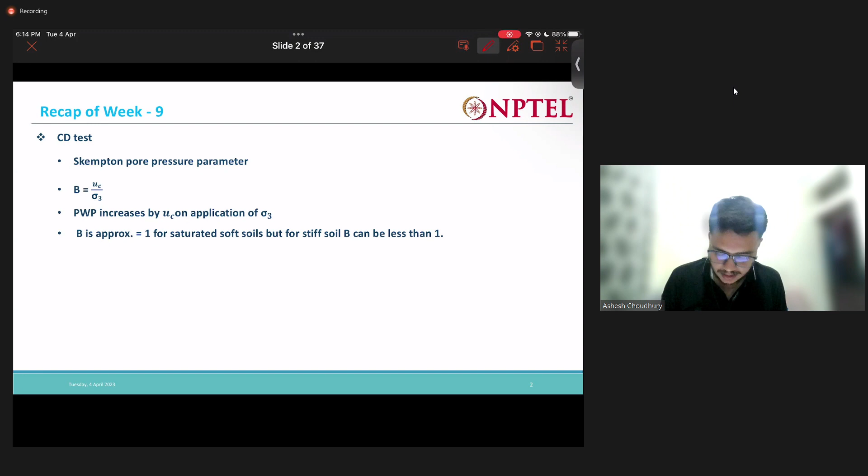Okay. So you might be wondering, how do we actually saturate the sample, right? So there is a process of saturating the sample.

Over the years, many researchers have done experiments and given a process where we can saturate the sample very fast. What we do is apply back pressure and cell pressure simultaneously, and using that we saturate the sample.

Also, we need to put some filter paper around the sample so that the soil gets saturated. There is a defined procedure which you can find in the literature, using which we saturate the sample.

And how do we check that our soil is completely saturated or not? We check it by calculating our B parameter, and our B parameter should be close to 1 to ensure that our soil is completely saturated.

Okay, so after we ensure our soil is completely saturated, we start our consolidation stage. How do we start it? We keep on increasing the cell pressure and then fix it to 1 point. Then we open the drainage valve. As soon as you open the drainage valve, what will happen?

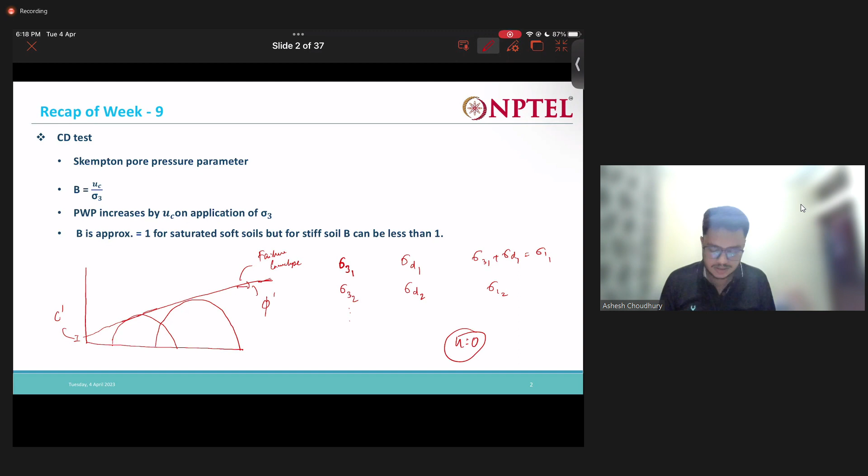Now in the CU test, the first stage is exactly same as the CD test. So there is consolidation. After the consolidation is over, what we do is close the drainage valve, and after closing the drainage valve, we apply our deviator stress.

So here we are not allowing drainage to occur. As we are not allowing drainage of water to occur, what will happen? As we are applying the deviator stress, as we are increasing the deviator stress, my pore water pressure will be generated, right? Pore water pressure will keep on increasing as soon as we start applying this deviator stress.

So here we define another pore pressure parameter, which is A, here we have written as A bar. A bar is nothing but the ratio of the change in increasing pore pressure due to the increasing deviator stress - pore water pressure increased by this amount due to increasing the deviator stress by this amount, in the second stage.

As I was saying, why is CU test sometimes preferred over CD test? Because CU test is actually faster. In the second stage, we need not bother about the drainage of water, so that undrained second stage in the CU test can actually be completed very fast. CD test is actually very long, so if you want to expedite the process, we can do the CU test.

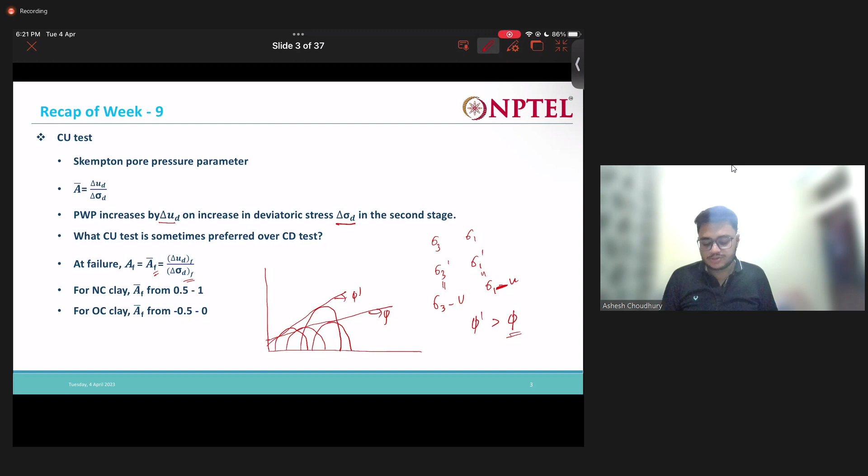So we'll be getting this. Now we see that at failure, my A value, A bar value at failure - we write F for at failure - is nothing but ud at failure by sigma d at failure. So for a normally consolidated clay, my A value generally varies from 0.5 to 1, and for over consolidated clay it varies from minus 0.5 to 0.

So as you keep on shearing, what will happen - this part actually is my normally consolidated part. In the normally consolidated part, my pore water pressures are always positive, and in over consolidated soils, or in dense sands, there is a tendency that if drainage is not allowed, then negative pore water pressure develops. Due to this development of negative pore water pressure, we are actually getting this negative A value.

Okay, you are getting this negative A value from here. If the soil is normally consolidated, my pore water pressures are always positive. So that's why we have this A value varying from 0.5 to 1. Okay, so these are the differences.

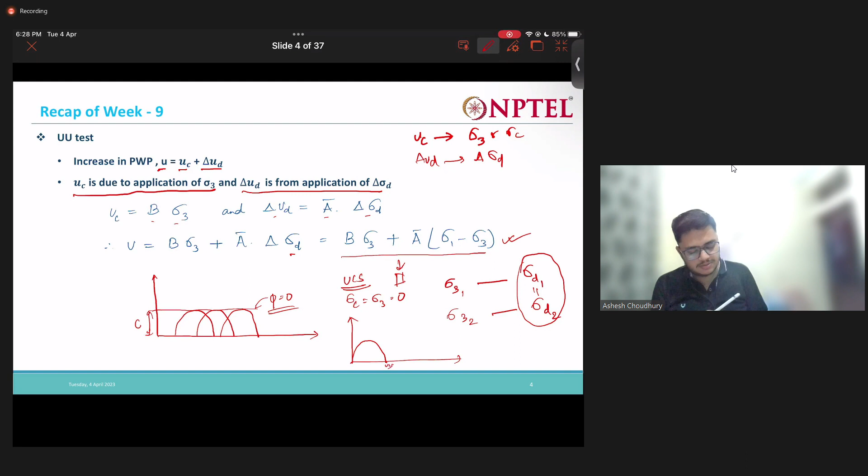Now if I want to find my C value, the cohesion value, this is my cohesion value. If this is my UCS, say QU, this cohesion will be nothing but QU by 2. So in the UCS test you get a circle something like this, where sigma 3 is 0 and this is nothing but my QU.

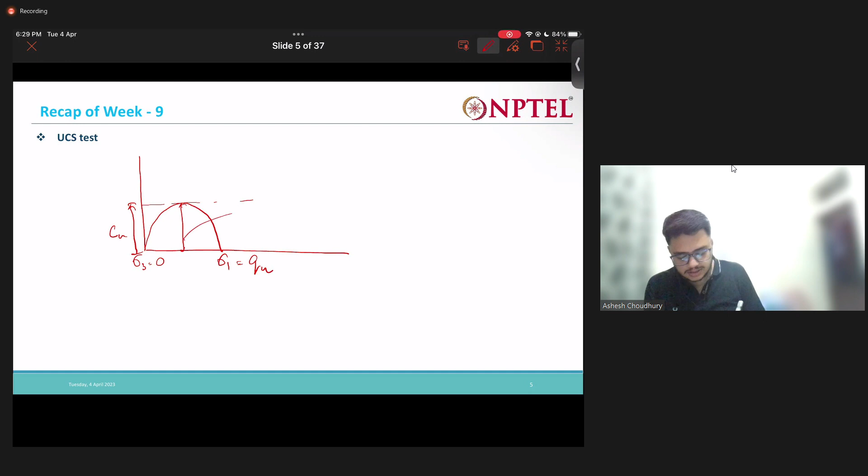So how much is this length? This length is nothing but QU by 2. Now what is my shear strength? C plus sigma tan phi. So from here, since phi is 0, it's nothing but C, which is QU by 2.

So generally, theoretically, whatever C value you calculate from the UCS test should be equal to the UCS value divided by 2, and should also be equal to the cohesion value you calculate from the UU test. Theoretically, this should be the case.

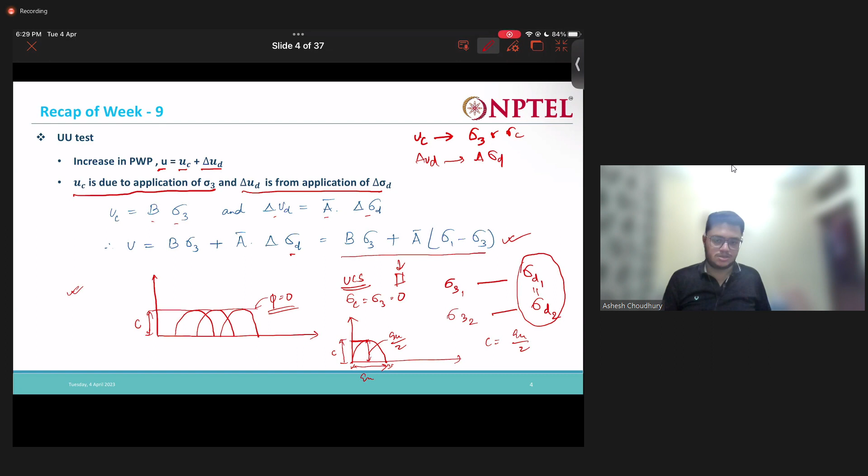Okay, so the next topic introduced in the previous 9th week lecture was stress path. So what is stress path actually? The stress path is nothing but the locus of the points representing the stress states during the progress of the test. Take for example a triaxial test, or for simplicity, a UCS test.

So in a UCS test, what you are doing is you keep the sample and you keep on applying axial stress, axial load. So you're increasing the axial load, say first 1, 2, 3, like 3 kPa, 4 kPa, you're increasing the axial load, right? So at a certain point it gets failed.

This progress of the test, you are gradually increasing your applied stress. That gradual increase in applied stress is actually represented in terms of a stress path. That's why we say it is the locus of the points representing the stress states during the progress of a test. So by seeing a stress path, we can actually guess what kind of test has been conducted on that soil.

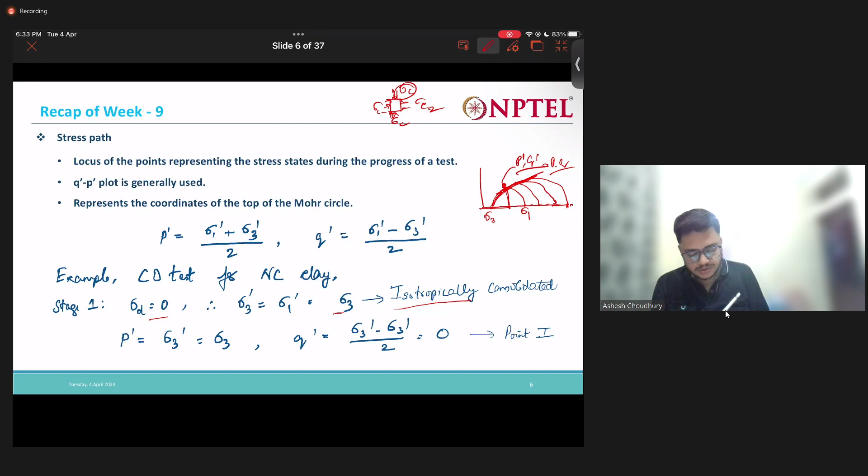So for normally consolidated clay in the first stage, sigma d is 0, and it's isotropically consolidated, so everything is equal to sigma 3. So what will be p dash? P dash will be nothing but sigma 3 dash plus sigma 3 dash by 2, so it will be nothing but sigma 3 dash equal to sigma 3. So effective stresses are equal to total stresses because the pore water pressures are equal to 0. No pore water pressure, so sigma dash is equal to sigma. And what will q be equal to? Q will be nothing but 0. So this is represented by point I, this point.

Now at some other time, as the test progresses, say at time t equal to 0 we have this point I, and as the test progresses, we go to the second stage. In the second stage, what we are doing is applying deviator stress.

Sigma 1 dash will be sigma 3 dash plus this delta sigma d. And since there is no pore water pressure, sigma 3 dash is equal to sigma 3, because the pore water pressure is 0. So this will be my p, this will be my q.

So if we join all these points, all these p and q points, we will get one straight line. This straight line is nothing but my stress path, and this stress path is actually inclined at 45 degrees to the p axis.

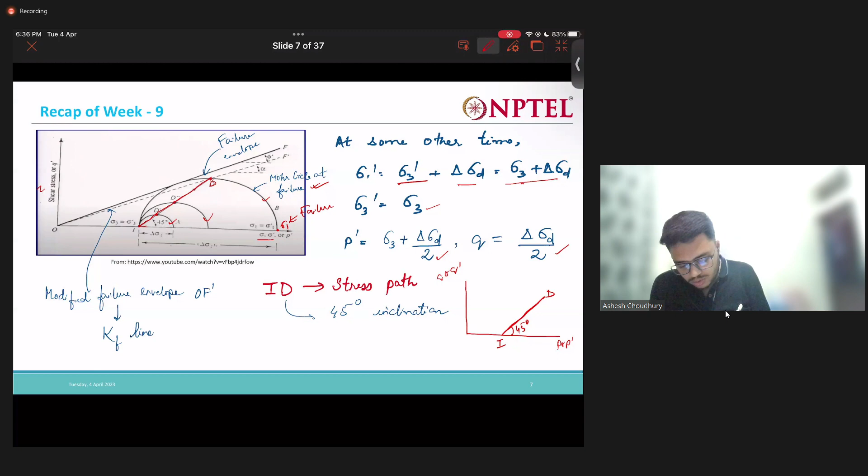Now if we join this O point with the D point, this is nothing but my failure envelope, the modified failure envelope. If you join this O and D line, extended till F dash, this O F dash line is called the modified failure envelope, nothing but my KF line. And what was my original one? This OF line is nothing but the failure envelope that you will get.

How will you get this failure envelope? You will actually get it by drawing various Mohr circles for various tests, various values of sigma 3, and joining the tangent. This will give you your failure envelope.

And how will you actually get this modified failure envelope? If you join all these lines, the coordinates of this next point - if you join all these points, you will get your modified failure envelope. The modified failure envelope is inclined at alpha angle, and my failure envelope is inclined at phi dash angle, as you all know.

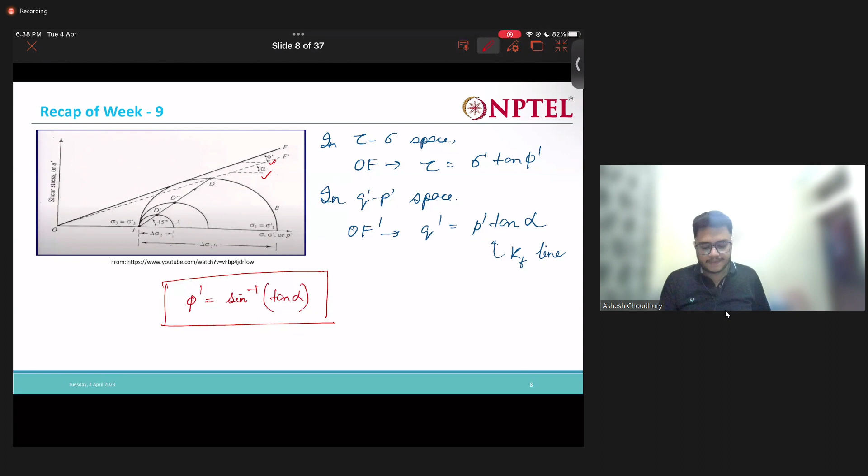So now if you want to get some relation between phi and alpha, we can just look at the geometry. From the geometry we get that phi dash is nothing but sine inverse of tan alpha. So if you know the KF line, from the KF line we can actually get our phi values.

Say you have sigma 1 and sigma 3 values at failure. From these values you can get this point - you can get the p point, you can get the q point. So what you can do is plot your modified failure envelope, and from there measure your alpha, and from alpha you will get the phi value.

Again, if you want to check this, you can use these values to draw your Mohr circle. For different sigma 3, you will get different sigma 1 at failure. So like this, if you draw this, from here you measure the phi value, then you can check whether this relation holds true or not.

So why do we use this p-q line? Generally, drawing circles is a little bit difficult - you have to draw the circle, and drawing a straight line is relatively easy. You just need some points and join them to get a straight line. So drawing circles and then drawing tangents is a little bit difficult.

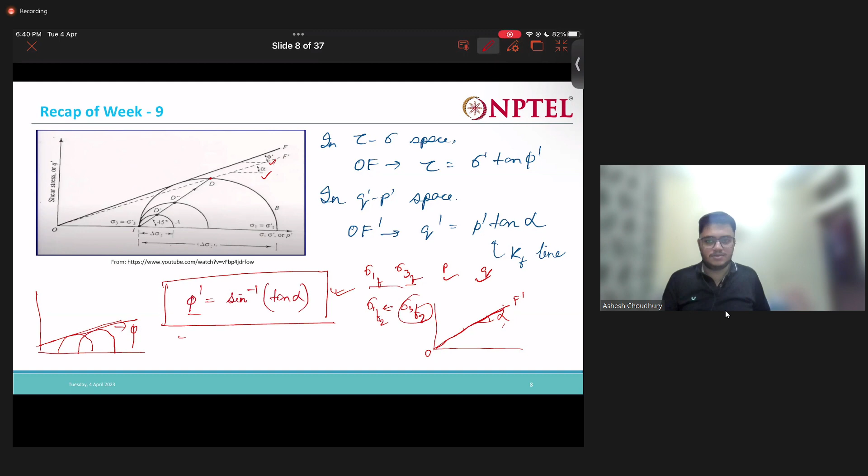Now we see the example of the CU test. In CU test, the first stage is the same. In the first stage there is no sigma 3, so all these are equal, and there is no pore water pressure, so it will be nothing but the same I point.

In the second stage, as it is a U test, what will happen is that you will be getting some pore water pressure values. Some pore water pressure values will be generated while we apply this deviatoric stress. So from there, if you plot, you will get a stress path like this.

Okay, this is my modified failure envelope or KF line. So this line, this is not a straight line, it is actually a curved line.

And say you have like this, and this is for two tests you are doing. So if say you have this figure in front of you, someone asks you to identify what are the tests that were conducted.

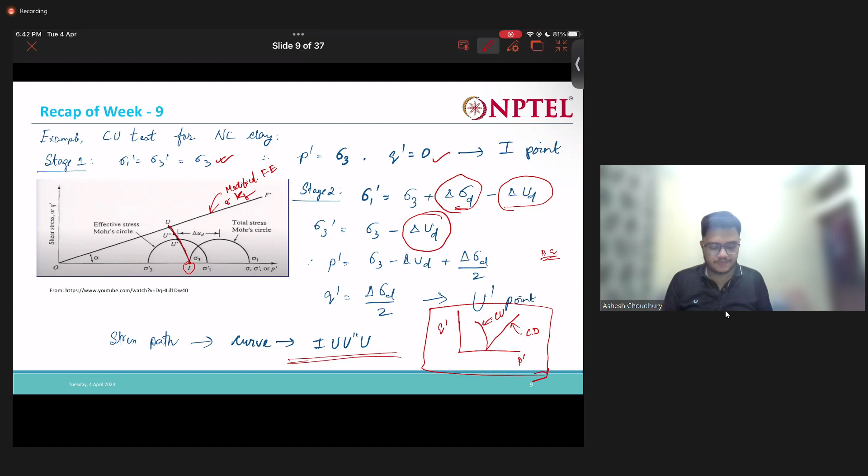You can directly say that this is for the CD test and this is for my CU test, just by looking at my Q dash P dash plot. You can directly say this, just by looking at the P dash Q dash plot, that this is the line for my CD test and this is for my CU test.

They are originating from the same point, because in both these tests what we are doing is that we are consolidating the soil up to a same value of my cell pressure. That's why they start at the same point.

So this stress path is actually very important in critical state soil mechanics. Critical state soil mechanics is an advanced topic, a postgraduate level topic where the various soil models are described with the help of stress paths drawn in the P-Q space. We need to understand this stress path because in critical state soil mechanics, this forms a very helpful tool for us to represent the various soil models and how to understand how the soil actually behaves.

So critical state soil mechanics is actually an advanced level course. It's generally taught at the postgraduate level.

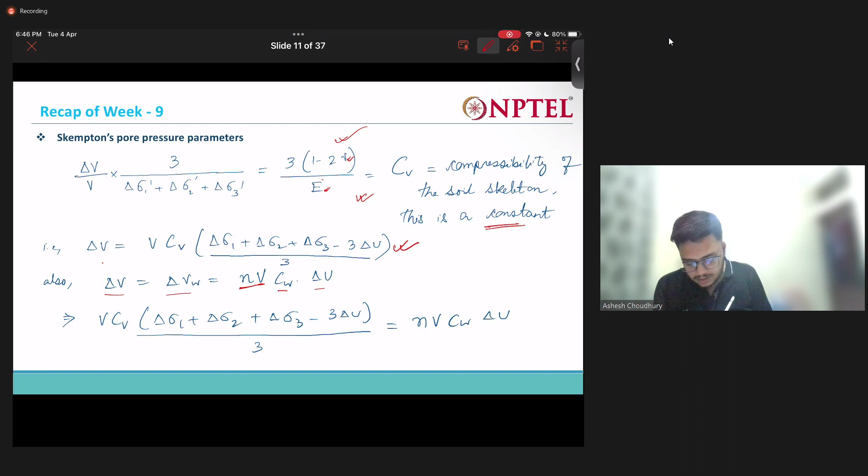Now we put this here, then we equate these two, and we get this as the expression for my increasing pore water pressure. So the increasing pore water pressure is 1 by 1 plus n CW by CV into this value.

Now, sigma 2 is actually equal to sigma 3, so from here you can write, or delta U is equal to B into this. So we had seen this expression before only.

So this part you are writing it as delta U1. Delta U1 is nothing but B into sigma 3, the increase in pore pressure contributed during the application of cell pressure. And delta U2 is the increasing pore pressure due to the increase in deviatoric stress.

So one more thing you can see here, this A dash is equal to A into B. This AB is together written as A dash. And for saturated soil, if the soil is completely saturated, then B is equal to 1, so you will get A dash equal to A.

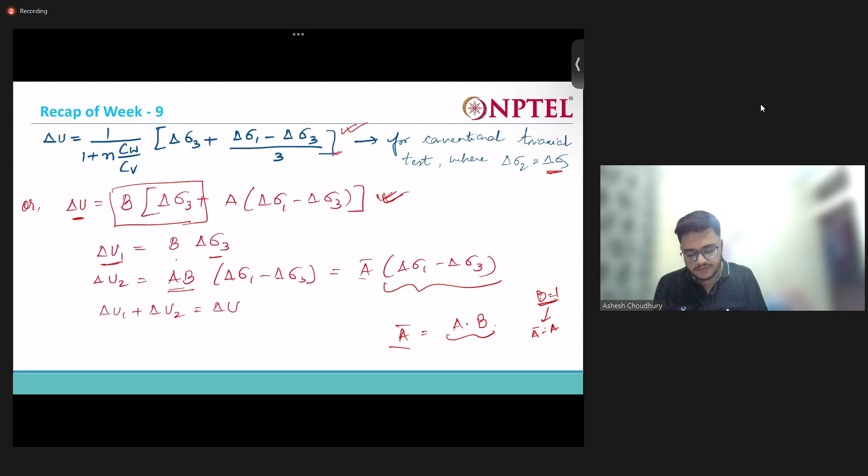Don't confuse this CV with the coefficient of consolidation, that is a different thing. So CW is much lesser than CV, so this ratio will be close to 0 because this is very less and this is very high. So my B will be close to 1.

And for dry soil, the pore is completely filled with air, so the compressibility is very high for air since it is a gas. So this CW by CV will be close to infinity, so my B will be equal to 0.

So how can we measure B? We already studied that B can be measured in the UU test in the first stage. For completely saturated soil, you are increasing your cell pressure from 1 kPa to 2 kPa, your pore water pressure should also increase by 1. The increase in applied cell pressure should be reflected in the increase in pore water pressure. If that is exactly equal, you are saying that my soil is completely saturated.

And how can we measure this A dash parameter? This can be measured in the second stage in the CU test. You are applying some deviatoric stress, and due to that application, your pore water pressure is increasing. So the ratio of these two will give you your A dash.

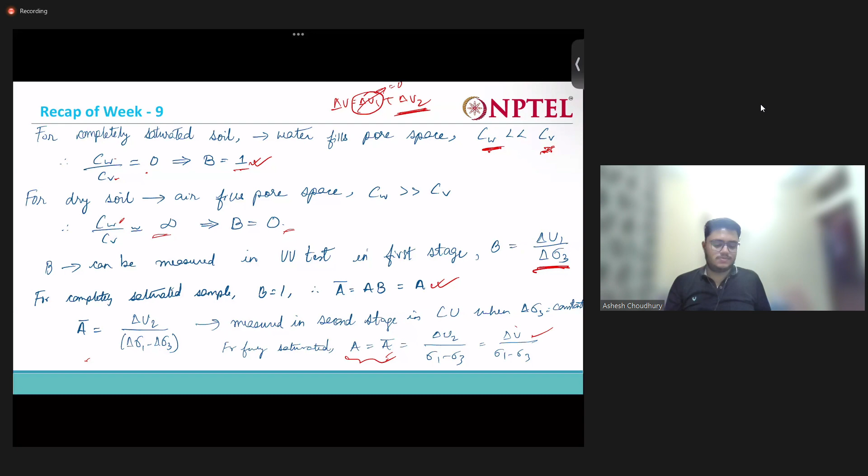Okay, now let us start solving the problems one by one.

This shear strength topic is actually very conceptual. If someone is studying to be a geotechnical engineer, these basics of soil shear strength should be very strong, because shear strength forms the main structure of soil mechanics. The whole mechanics of how soil behaves is actually dependent on these things.

In reality, the shear strength chapter is very vast. In this course, you've just been introduced to the basics, but this chapter can go into more depth, into critical state soil mechanics, soil plasticity theory, and how soil behaves in the plastic state. All these things are ultimately dependent upon the basics of shear strength.

So let us now go to the problems. The first problem: a UCS test was conducted on a soft clay in both in-situ and remolded samples. So we have both an in-situ sampled and a remolded sample.

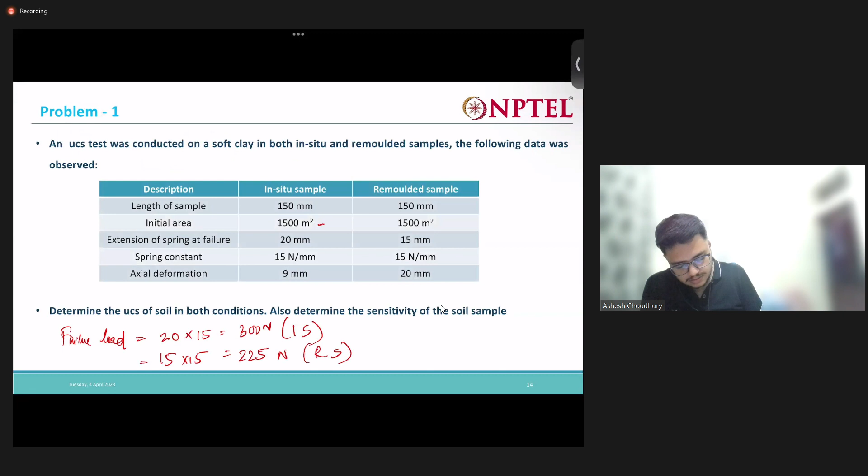The final area will be nothing but A0 over 1 minus strain. A0 is 1500 mm square. The axial strain given is 9 mm over the length, which is del L by L. Del L is 9, and the length is 150. So please calculate how much Af is coming.

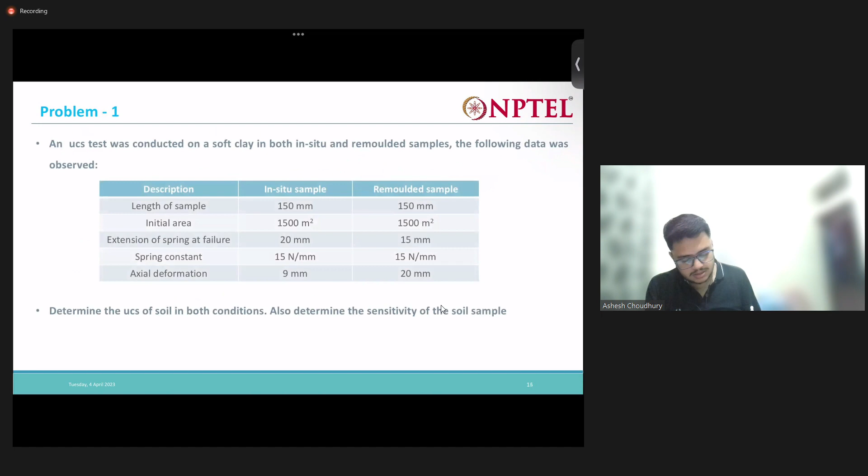So you are seeing my remolded strength is coming lesser than in situ strength. So what is my sensitivity?

QU undisturbed by QU remolded, right? So undisturbed is 0.188, 1.25. Okay, so this sensitivity actually falls between 1 and 2. So this is actually a low sensitivity soil. Okay, this is actually a low sensitivity soil.

All right, so pretty straightforward question.

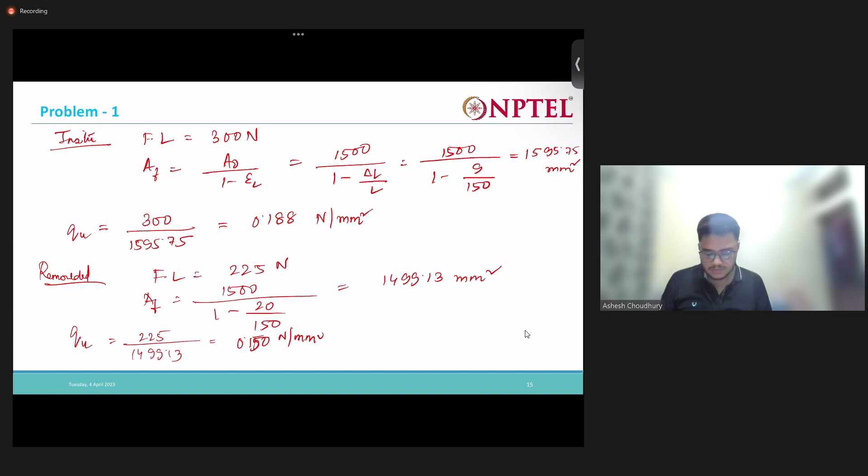Now let us go to the next question. Okay, a vane 100 mm in dia and 200 mm in height was pressed into soft clay in a borehole. The torque was applied and gradually increased to 100 Newton meter when failure took place. We need to determine the undrained shear strength.

Okay, so it is a problem of our vane shear test. So in vane shear test, the vane is inserted into the soil and it's rotated, right? So that there is a torque applied in the vane, okay, and the vane is rotated. So that torque is actually related to my undrained shear strength.

Right? So why are you calling it undrained shear strength? Because the soil test is fast, very fast, right? We do not allow the pore water pressures that get developed during the application of the torque to get dissipated. So we call it an undrained test. Undrained, we can always get the undrained shear strength.

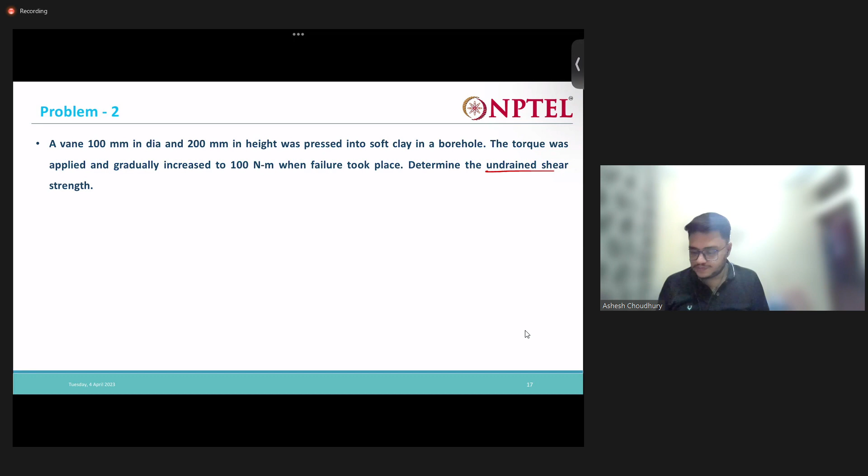So the dimensions of the vane are given, and also the failure torque is given, right? So dimensions of the vane are given by failure. So let us write all these things. So D is 100 mm, H is... now my undrained shear strength.

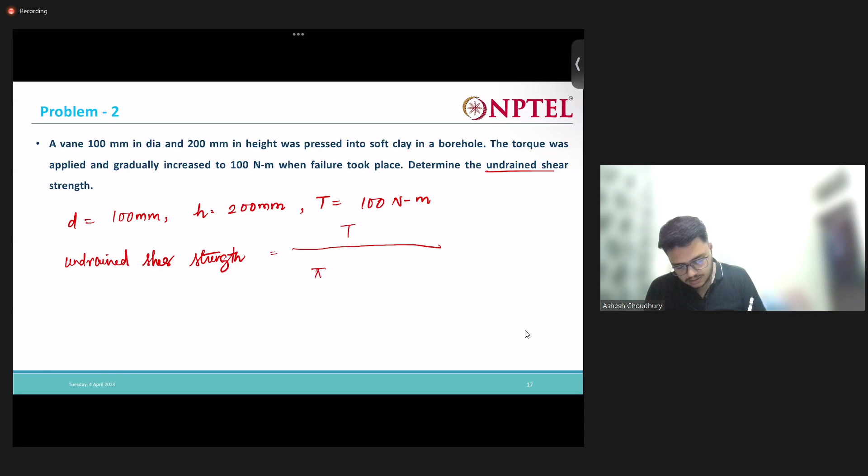Undrained is equal to torque by pi. So if we consider uniform distribution at the top and the bottom of the vanes, then we will get this relation, okay, for the undrained shear strength. So beta value we are considering for the uniform, that's why we are getting this expression.

Now what is my T? 100. So please calculate this. Please calculate. Let's see.

So these vane shear tests are generally used in highly sensitive clays. Okay, say you have clay near the shoreline or something like that. It is very difficult to collect undisturbed sample. So when it is very difficult to collect undisturbed sample, this vane shear test is very helpful to us. Okay, so you can take in.

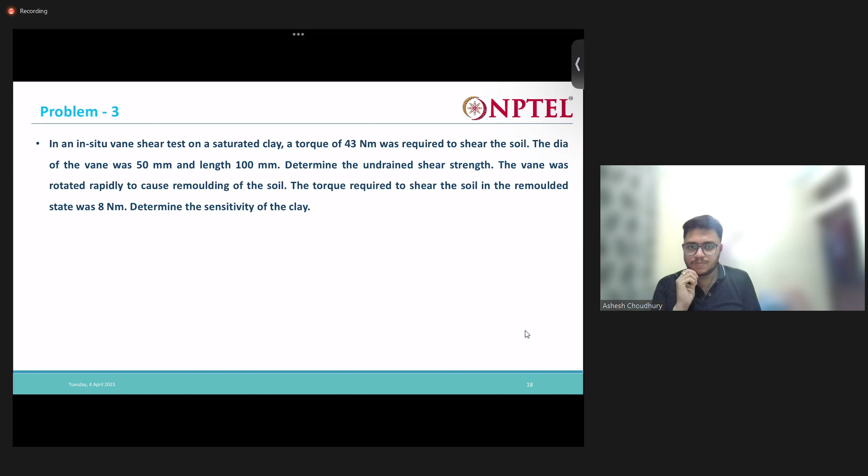Okay. So here it's same. It's similar to the previous problem. So we need to determine in two cases, for the in situ sample and the remolded sample. And then we need to determine the sensitivity.

Okay. So let us first calculate for the in situ. It's better to write here remolded. Sorry. Undisturbed. Same.

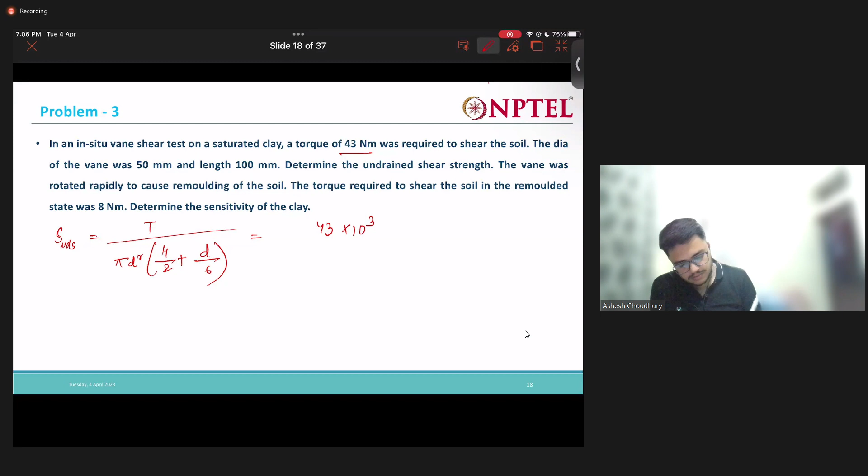So what is my T? 43 Newton meter. So I convert it to Newton mm, then pi into... see, to calculate this one, and similarly for remolded we will have... so please calculate these two.

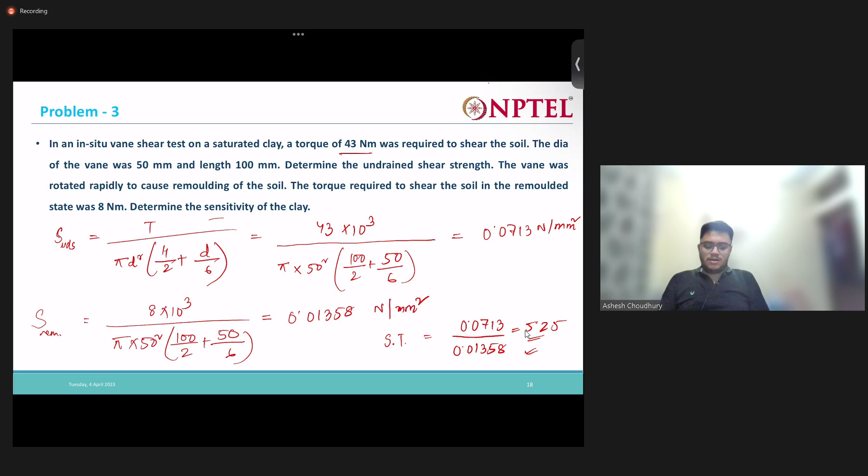So an embankment 5 meter high is made up of soil whose effective stress parameters are C dash equal to 50 kPa and phi dash equal to 16 degrees, and gamma is 16.2 kilonewton per meter cube. The pore pressure parameters as found from the triaxial tests are A equal to 0.4 and B equal to 0.49. Find the shear strength of the soil at the base of the embankment just after the soil has been raised from 5 meter to 8 meter. Assume that the dissipation of pore pressure during the stage of construction is negligible and that the lateral pressure at any point is 1/2 of the vertical pressure.

So we have a 5 meter high embankment for which C dash and phi dash values are given to us, and also we have the pore pressure parameters for that soil found from a triaxial test, A equal to 0.4 and B equal to 0.49. Now we need to find the shear strength at the base of the embankment just after the soil has been raised from 5 meter to 8 meter height.

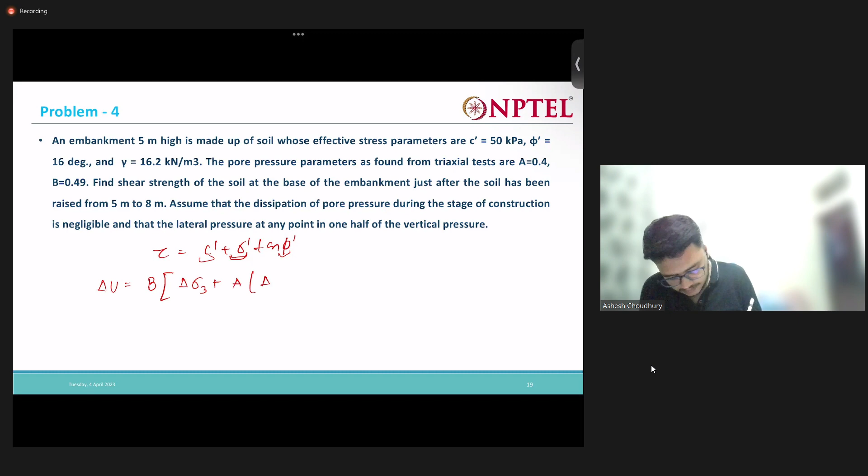Okay, so what is my delta U? This is my expression for the increase in pore water pressure. First tell me, what is delta sigma 1? Delta sigma 1 is nothing but the increase in vertical stress.

So during the construction from 5 meter to 8 meter, when the height of the embankment is raised, what is the increasing vertical stress? Due to this increase, there is an increasing vertical stress at the bottom of the embankment. So here we had the embankment, then it was raised, initially 5 meter, now it's 8 meter. So the vertical stress will obviously get increased, right? Can you tell me what is the increase in vertical stress due to this construction?

Gamma into 3 meter. Yeah, gamma into 3 meter. So 3 into 16.2 is calculated as 16.2 into 3, which is 48.6. Okay, so this is my increase. Now can you tell me what is the increase in my lateral stress? It is delta sigma 3.

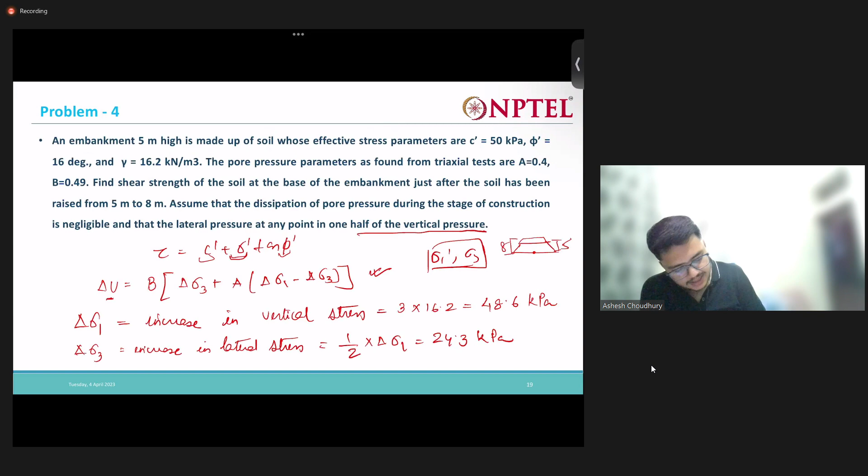Now tell me my sigma n, it is the vertical or normal stress acting here. It will be nothing but 8 meter into gamma, which is 8 into 16.2. And what will be sigma dash? It will be 8 into 16.2 minus 16.67, which is 112.93 kPa. Now we just got the effective parameters.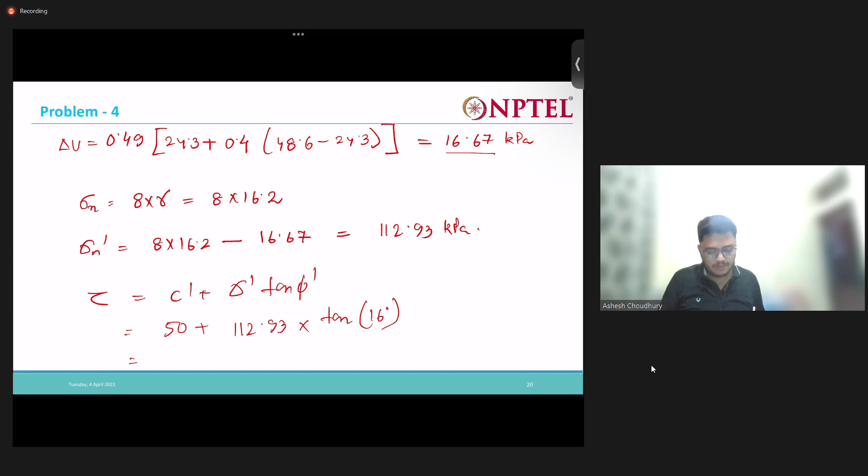Now you can calculate the shear strength. So what is the C dash that is given to me? 50. Sigma dash, you know, is 112.93, and phi is 16 degrees. So let's calculate 50 plus 112.93 into tan 16. It will be 82.38 kPa. So this is my shear strength.

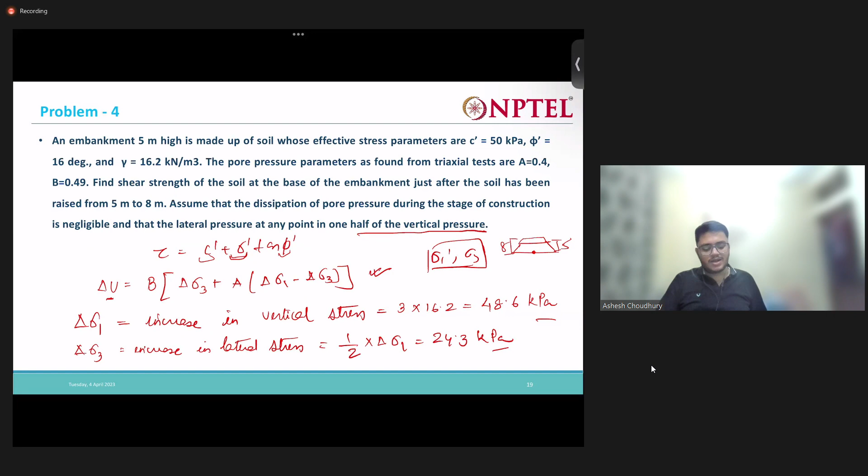So let us see how you calculate this. First step was to calculate the increase in pore water pressure. The increasing vertical stress, I know, is my sigma 1. The increasing lateral stress, given as half of delta sigma 1, I put into the U equation to get the increase in pore water pressure. Then, having got this pore water pressure, I deduct it from my vertical stress to get the effective value, and then I can put all the values in the equation to get my shear strength.

Okay, so this is the next problem. Problem 5: A saturated clay sample was obtained from the field without allowing the water content and the void ratio to change, that is, an undisturbed sample. A sample was subjected to the following stresses in the field: sigma value 240, pore water pressure was 140, and effective sigma is 100. This was the stress state in the field. Now these are the various questions from A to H that we need to calculate, that we need to find out.

So the first question is on sampling: what are the stresses acting on it? The sample was placed in a triaxial cell when it was subjected to a cell pressure of 100 kilonewton per meter square under undrained condition. So this is what is asked to us.

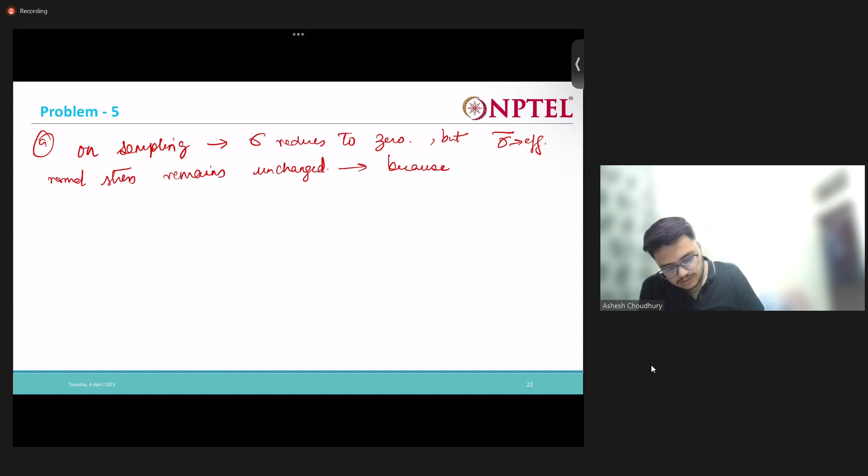So now the first condition is on sampling: what are the stresses acting on it? On sampling, sigma reduces to 0, because you are taking out the sample, the sigma reduces to 0, but the sigma dash, that is my effective normal stress, remains unchanged. This is because sampling was perfect, and void ratio did not change. So we have sigma equal to 0.

So my total stress, meter square... so my pore water pressure will be how much? Sorry, just a second.

So pore water pressure will be minus 100, right? That's why this is 0.

Now let us come to B. The B is what are the stresses? The sample was placed in a triaxial cell and subjected to a cell pressure of 100 under undrained condition. So now we have to tell what are the cell pressures. We are applying a cell pressure of 100. That's good, so this will change to 100. U will change to minus 100 plus 100 equal to 0, and sigma dash will be equal to 100.

Then the cell pressure was raised to 320 kN/m² with the drainage valve closed. So as soon as we raise the cell pressure to 320, sigma will also rise. U remains 0 and sigma dash will be again...

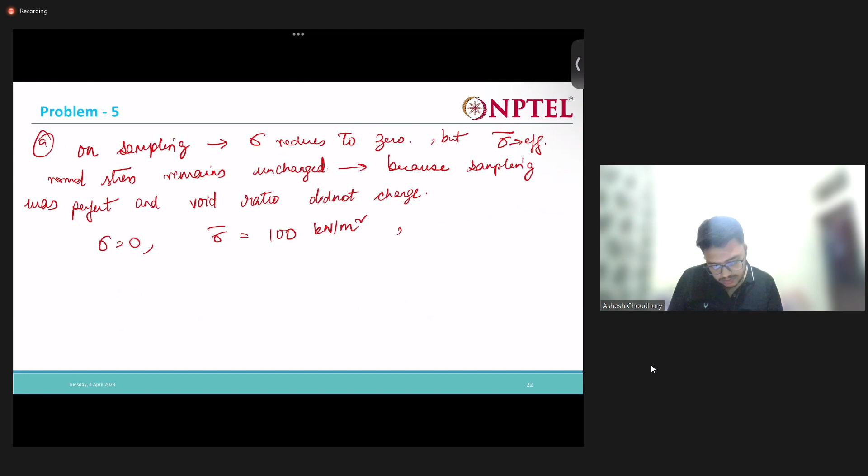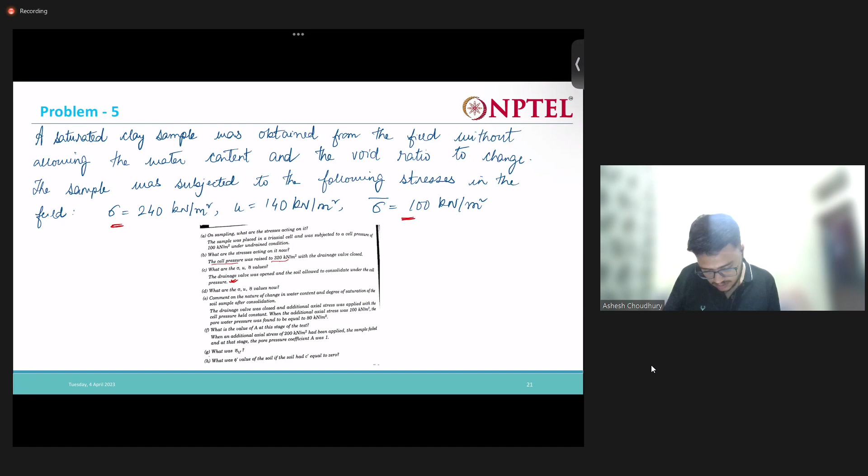Just a second. Okay, there might be some issue in the solution. I think there is some problem in the solution, not correct, I guess. Cell pressure. Okay, so leave this question for now. I will see it in the next class. I have to check the solution once because I think there is some problem in the values, that's why it's not matching. So leave this problem for now.

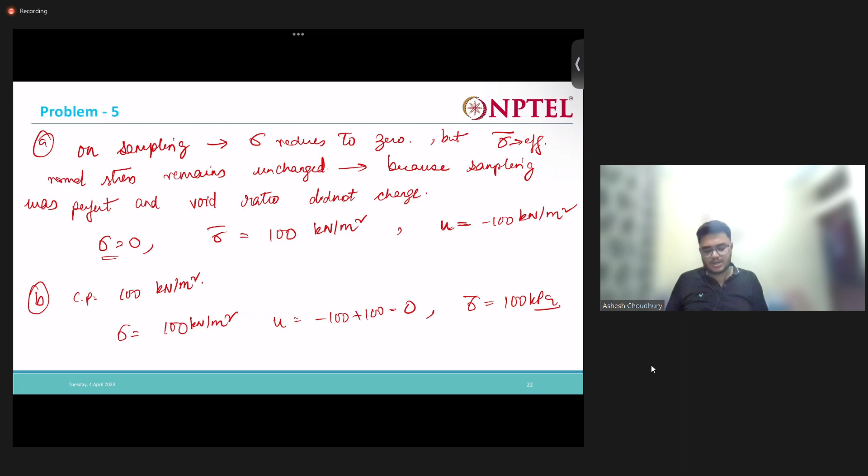We will continue this in the next class. I will just see this once properly, and then we will try to solve it. This problem is actually a little typical, not that straightforward, and I think there is some problem in the solution also. Okay, so I will see this in the next class. So leave this one, let us see the other problems.

Okay, so you try, if you are able to solve this by yourself, just try once. I will check again with the solution this week, and if this problem is fine, I will try to solve it in the next class. Else you just leave this one. I did not see the solution before, but now as I am seeing it, I think there might be some problem, so I am not sure. Let us not waste time on this, and let us go to the next problem.

Okay, so UCS test was conducted on an undisturbed sample of clay. The sample had a diameter of 37.5 mm and was 80 mm long. The dimensions of the sample are given. The load at failure measured by the proving ring was 28 newtons, and the axial deformation of the sample at failure was 13 mm. So we need to determine the UCS and the undrained shear strength of the clay.

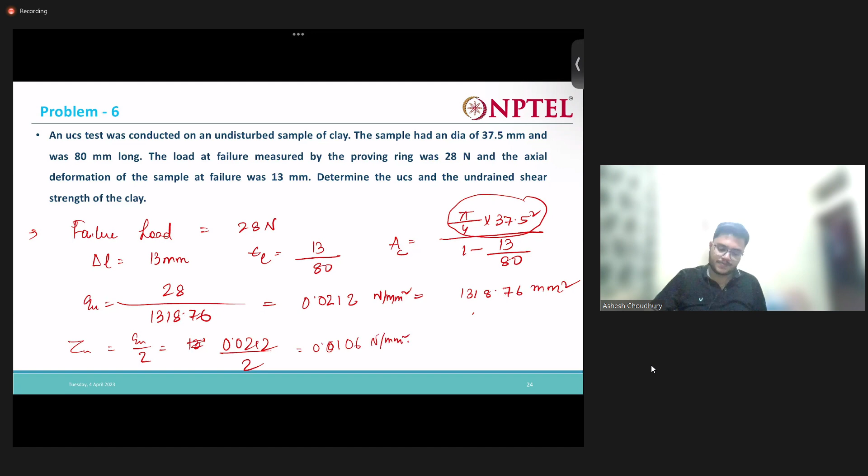Sorry, 0.0212 divided by 2, check back to 0.0106 square. Okay, simple.

Seventh problem: we have in a CU test on a normally consolidated clay, the sample consolidated under a stress of 200 kPa failed at an additional axial stress of 150 kPa. The pore pressure at failure was 75 kPa, which was given to us.

Determine analytically the shear strength parameters both in terms of effective and total stresses. What are the values of the principal stress ratios? That is both effective and total principal stress ratios, sigma 1 dash by sigma 3 dash and sigma 1 by sigma 3. Both of these we need to determine, and also calculate the value of the A parameter at failure, AF.

It's written: normally consolidated clay, we are doing CU test. This was consolidated under a stress of 200 kPa, and this failed at an additional axial stress of 150 kPa, right? So determine analytically we need to determine. So first,

see, so what is given to us? What is sigma 3 at failure? What is sigma 3 at failure? 200. 200.

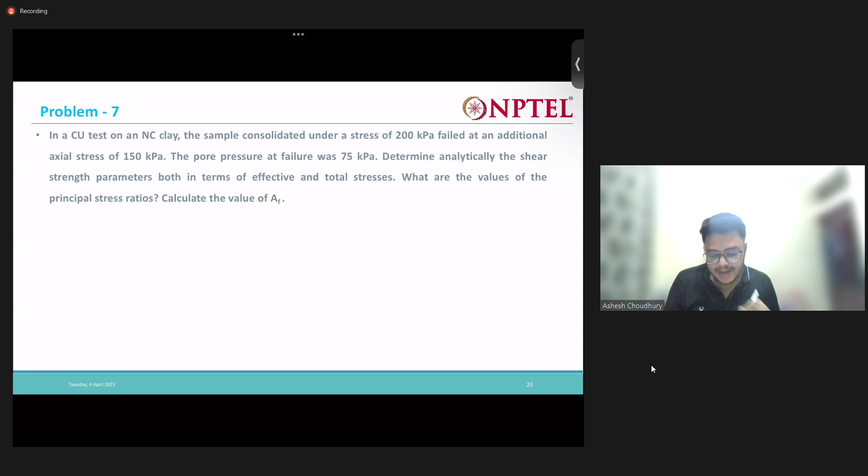Sigma 1 is equal to sigma 3 into tan square of 45 plus phi by 2, plus 2C tan of 45 plus phi by 2. Right? Now, as this soil is NC, normally consolidated, so what will be my C values?

What will be my C value here? It will be 0, right? We have studied that for normally consolidated clay, the C is 0, isn't it? As the soil is normally consolidated, it can be assumed that my C dash and my C values, undrained and C dash values, both are 0, right?

So it will be nothing but sigma 1 equal to sigma 3 into tan square of 45 plus phi by 2. Sigma 1 by sigma 3 you already know, you calculated just now: 1.75. So please calculate phi from here: root over 1.75, then tan inverse of that, minus 45, then into 2. It should be 15.8 degrees.

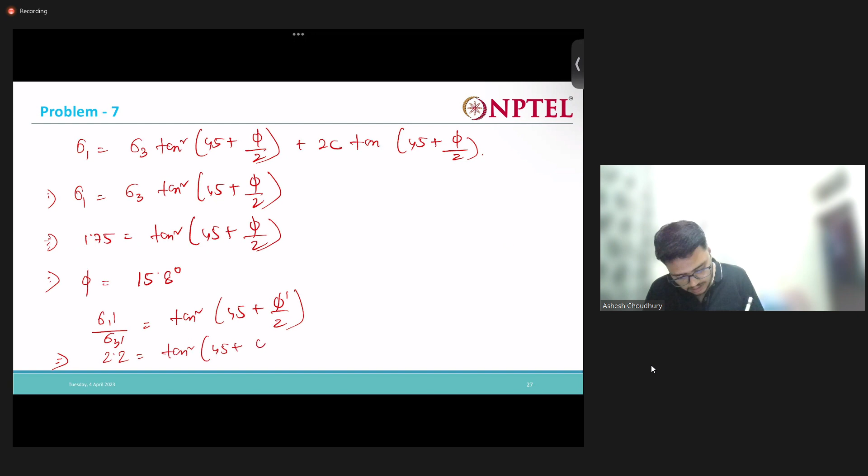Okay, and similarly we can find out this phi dash value. So you already know this 2.2. So please calculate the phi dash value: root over 2.2, tan inverse of that minus 45, then into 2, gives 22 degrees. Okay, so you can clearly see my phi dash is greater than phi in a normally consolidated clay soil.

Now there is the second part of this problem. What was the second part? Calculate the value of AF. It is the value of my pore pressure parameter A at failure, right?

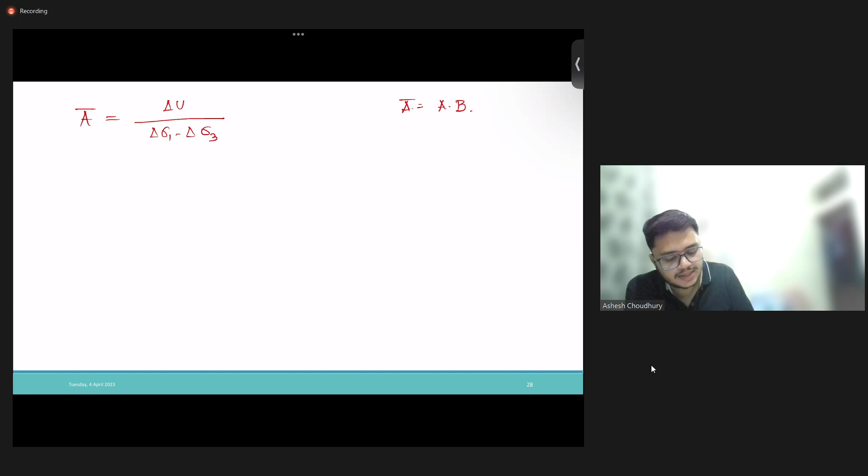Now this is actually the delta u2, right? So now delta u is equal to delta u1 plus delta u2. This delta u1 is actually equal to 0 because this is a consolidated undrained test. So in the first stage there is no development of pore water pressure. So this delta u is nothing but delta u2. So we can write A is equal to delta u by delta sigma 1 minus delta sigma 3.

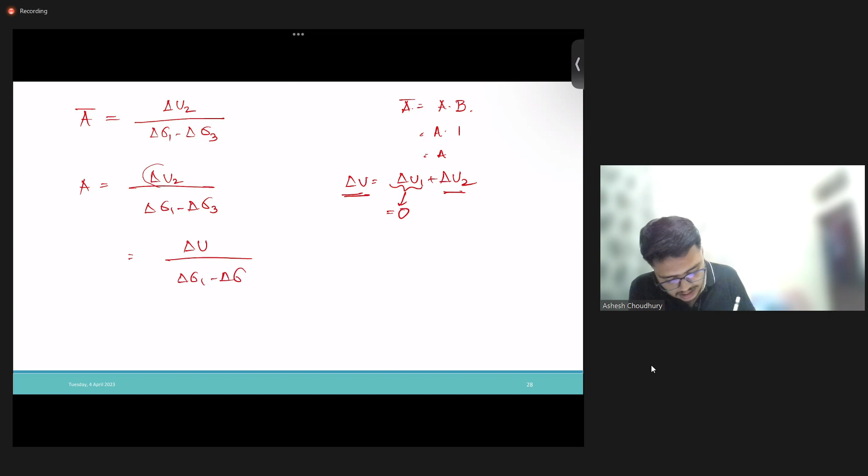Now what is delta u now? Let us see. So we need to calculate it at failure. Let us write failure. So how much the pore pressure increases? It is given in the question. The pore pressure at failure was 75 kPa, right? When was this 75 kPa? When this additional stress was 150 kPa, right? So due to this additional stress of 150 kPa, this 75 kPa pore water pressure is getting developed in the soil, isn't it? So what will it be?

Nothing but 75 by 150, that is 0.5. Okay, so this is within our range. We have stated that for NC it should be between 0.5 and 1. So you can see it is coming within our range also.

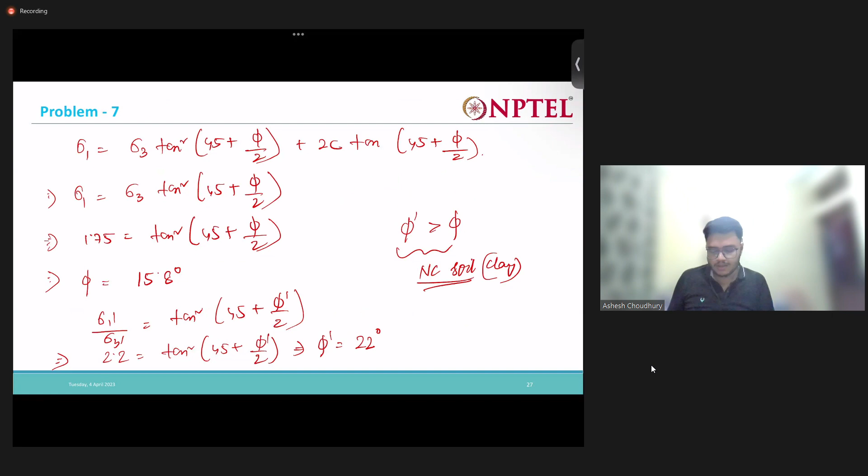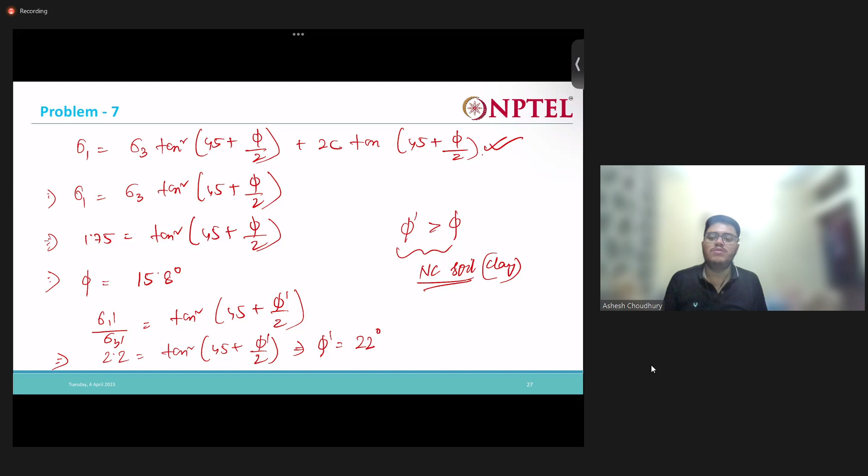Okay, so I hope this was clear. Very simple. So the main basic concept that you have to remember is that for a normally consolidated clay CU test, the C should be 0. Both C dash and C will be equal to 0. This is the first thing that should come to our mind. C should by default be equal to 0. Then what we have in our hand? We always have our this basic equation. This is our savior always, right? So we put C equal to 0 in both the cases, and sigma 1, sigma 3, sigma 1 dash, sigma 3 dash, we know. We put these values and find our phi and phi dash respectively.

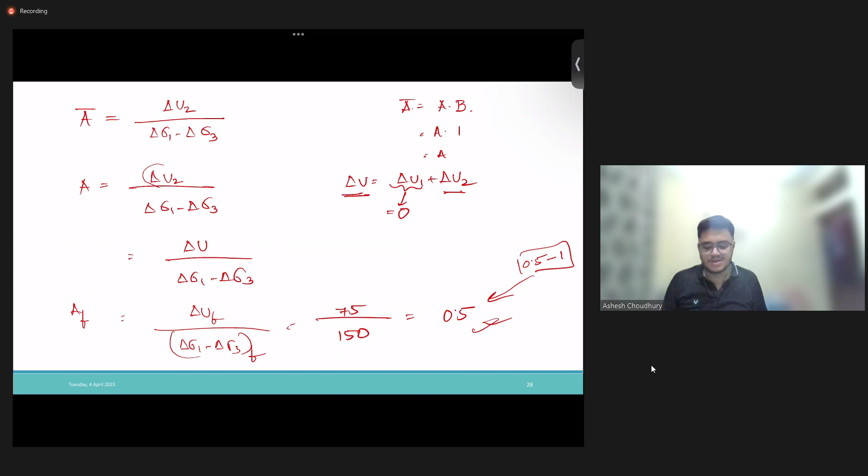Okay, so if this is clear, then let us go to the next problem. The results of a CU test on an undisturbed sample of an over consolidated clay were as below. Okay, so this is the result of a CU test that is given to us. Cell pressure is given, deviator stress at failure is given, and pore water pressure at failure is also given. We need to determine the effective shear strength parameters and plot the variation of my A parameter at failure with the over consolidation ratio.

If the pre-consolidation stress is given, why is it given to us? So that we can actually calculate the OCR. Okay, so the soil is actually pre-consolidated beforehand to a stress of 700 kPa, and after that we are reducing the stress and bringing it out. First we bring the cell pressure to 100, then we do the test, then increase to 200, do the test, 400 do the test, and take it to 600 and do the test. Okay, so initially it has been increased to 700 pre-consolidated, then the cell pressure is reduced to 100 first, then 200, then 400, then 600.

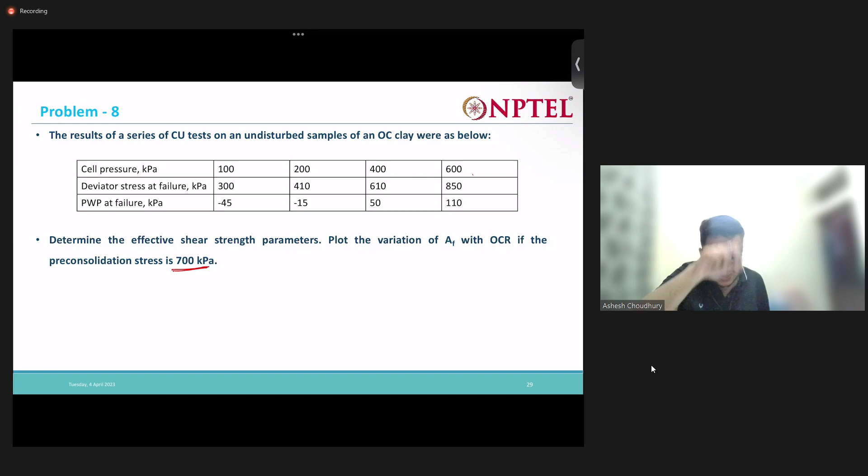Okay, so we have to calculate the effective shear strength parameters and plot the variation of my A parameter with OCR. Okay, so let us first form our table. First column will be my test number, then it will be sigma 3 at failure, which is nothing but my cell pressure at failure. So my second column will be my deviator stress at failure. So what is my deviator stress at failure? Sigma 1 minus sigma 3. Then I can find out my sigma 1 at failure, right? Then I have my u at failure. From this I can find out my sigma 3 dash at failure and sigma 1 dash at failure, effective values, right? So this forms our table for a test.

Okay, actually one more. Okay, now so okay, so I will make it later.

So test 1, what is my sigma 3f? Please keep on telling me, what is the sigma 3f for the first test? What is 100? Then what is sigma df? 100, 300. So what will be sigma 1? 400. What is uf? It is given as minus 45.

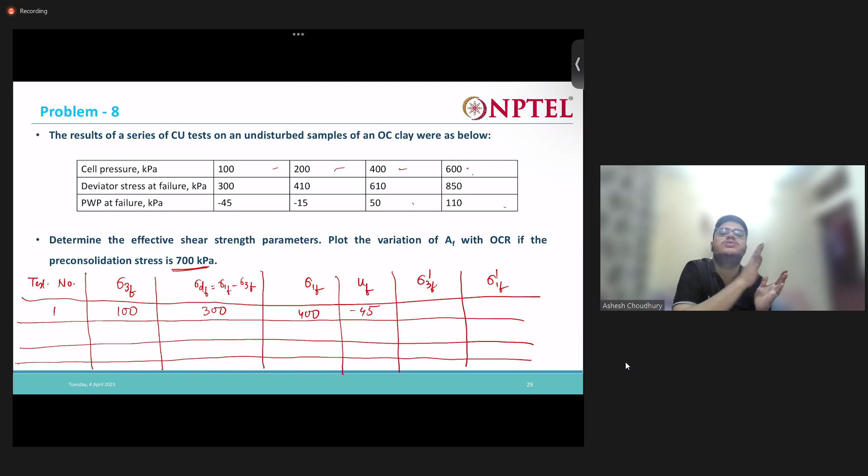As you see it's minus, so this reinforces our thing that it is over consolidated clay. Over consolidated initially it might be, now with negative pore water pressure. As the test progresses, our soil will tend to get closer to the pre-consolidation stage. If sigma 3 crosses 700, my soil will become normally consolidated. So as the test is going near to 700, my pore water pressure is actually getting positive. It means the soil is getting transformed into a normally consolidated soil slowly. So this thing is happening.

So let me write sigma 3 dash, what will be sigma 3 dash? 100 plus 45. What will be sigma 3f dash? Please tell me. 145. And what is sigma 1 dash? 445.

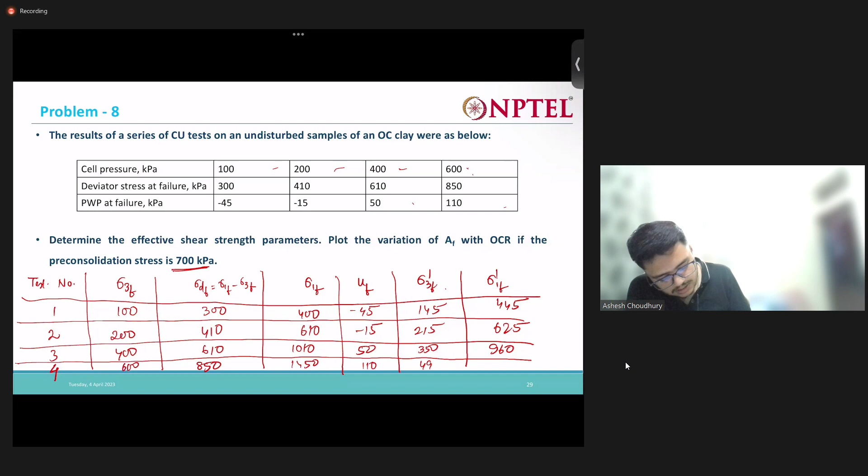Test 2 again we have 200, 410, 610, minus 15. So 200 plus 15, 215 is 625. Test 3: 400, then 610, then 1010, then 50. This is positive now, so 400 minus 50, it will be 350, 960. Then we have test 4: sigma 3 600, sigma d 850, will be 1450. It will be 110, 490, 1340. Okay, so we got this.

Now what we can do, we need to determine the effective shear strength parameters. So what we will be doing is using these two columns to plot our Mohr circles and to determine our effective shear strength parameters.

As we plot the Mohr circles, you can see these are the Mohr circles that were plotted. So for 4 tests we have 1, 2, 3, 4 Mohr circles plotted. Initially this was 145, this is 445, this is 215, this is 625, like this all 4 circles are plotted.

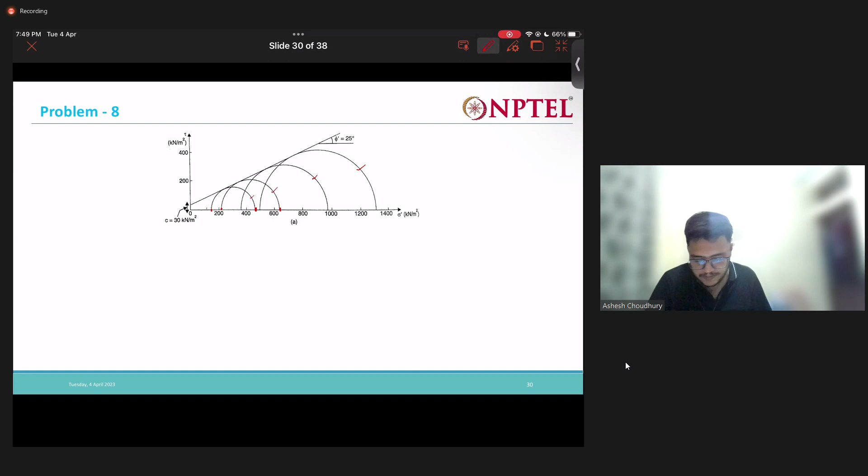After plotting these Mohr circles, what we are doing is drawing a straight line, a common tangent to all these circles, that will give us, what is this? This is nothing but a failure envelope. And the slope of the failure envelope we can find out after drawing. So we are getting phi dash equal to 25 degrees and C coming out as 30 kPa, right?

So the next part is we need to plot the variation of AF with the over consolidation ratio. This is my next part. So now let me make another table.

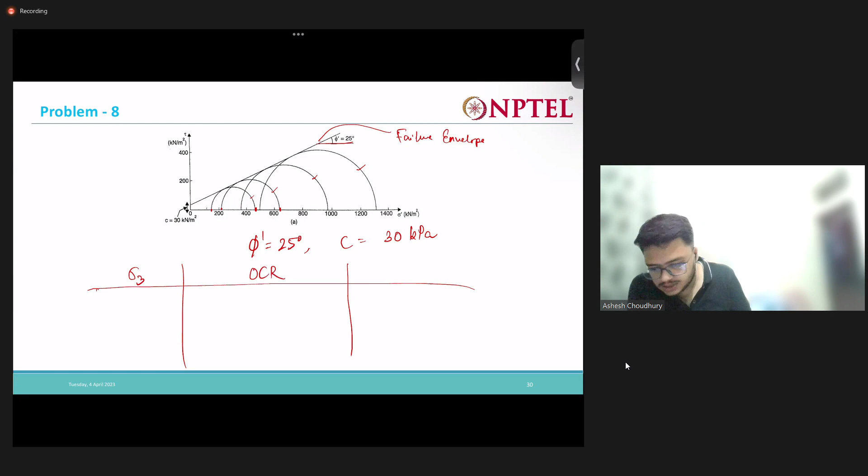Here we have sigma 3, we have over consolidation ratio, we have AF. So first my sigma 3 is 100. So what will be my over consolidation ratio, OCR, when sigma 3 is 100? What is over consolidation ratio?

Pre-consolidation stress divided by the present stress, right? So what is my pre-consolidation stress? It's given in the question as 700. So 700 divided by 100, that's OCR of 7. Then again we have 200, so 700 by 200 is 3.5. Then we have 400, so 700 by 400 is 1.75. Then we have last, 600, so 700 by 600 is 1.2.

So if this OCR is equal to 1, that means normally consolidated soil. So it is slightly more than 1, right? It is 600. Now what is AF?

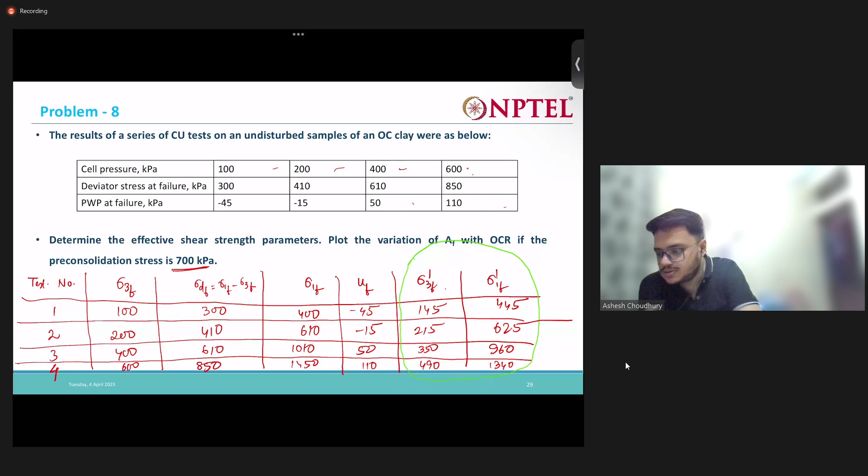AF is nothing but delta U by delta sigma D, right? So for the first case, what is my pore water pressure? Minus 45. So minus 45 by the deviator stress, minus 45 by 300, equal to minus 0.15.

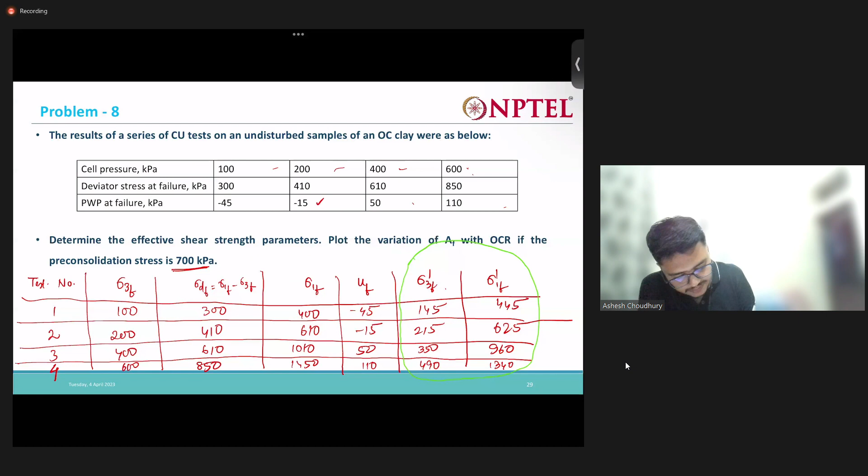Next case, minus 15 divided by 410, that is 0.036, 0.037. Then 50 divided by 610, then 110 divided by 850. So 50 divided by 610 is 0.082, and this last one will be 0.13.

Okay, so this one we got. Now we have to plot this. So let us draw: this side we have the OCR, this side plus AF, this side minus AF. When the OCR is here, we will be getting a line like almost this. So say it's 1, 2 like this, right? 2, 7, say. So you will be getting a line like this.

So initially OCR was high, my AF was negative 0.2. Okay, it was negative. Then what we are doing, as the OCR reduces, it is tending to become almost positive. It is tending towards positive. So this will be the variation of my AF with the OCR, that is the over consolidation ratio.

So normally consolidated, we know that A is always positive. So as the soil is tending towards the normally consolidated state, we are getting a value greater than 0. So if the soil would have been completely normally consolidated, we would have got a value between 0.5 and 1.

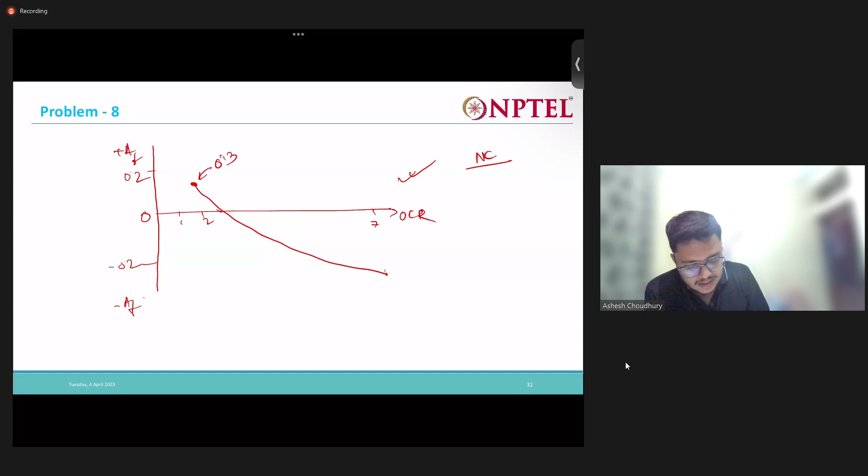So for NC, A value is always between 0.5 and 1, and for OC it's between minus 0.5 and 0. So this is our case.

Now let us move to the next problem. A compacted soil was tested in an undrained triaxial test using a cell pressure of 400 kPa. Before the application of cell pressure, the pore water pressure in the sample was 0.

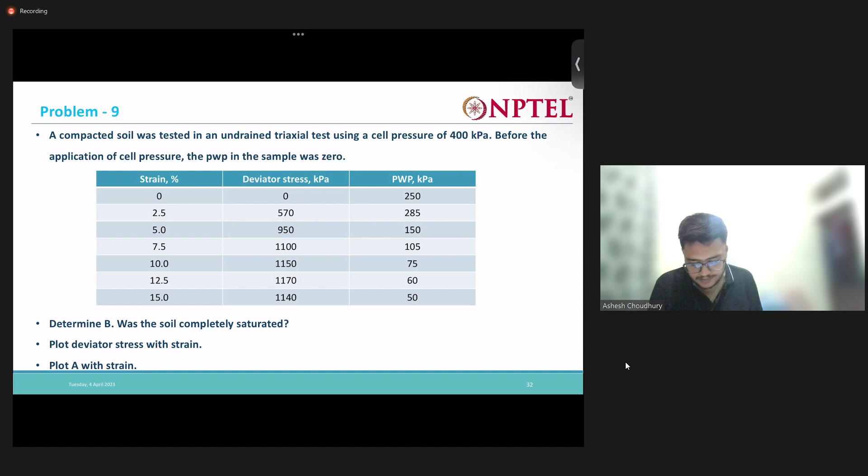Undrained triaxial test, right? So these values are given: the strain is given, deviator stress is given, and pore water pressure is given to us. You can see that when my deviator stress is 0, a certain amount of pore water pressure is there, which is nothing but 250.

So can you tell me from where is this 250 coming? How did this 250 get developed? You are not applying deviator stress, right? So this is not due to the application of deviatoric stress. So what is the other stress that you are applying? Cell pressure. So this 250 pore water pressure that gets developed at a deviator stress of 0 must be developed due to the cell pressure, right? This is not getting developed due to the deviatoric stress, this is coming from the cell pressure.

So as you are applying 400 cell pressure, the pore water pressure developed is 250. So first question is, was the soil completely saturated? Can you answer this? We are applying a cell pressure of 400, and against that the pore water pressure that gets developed is 250. So is my soil completely saturated?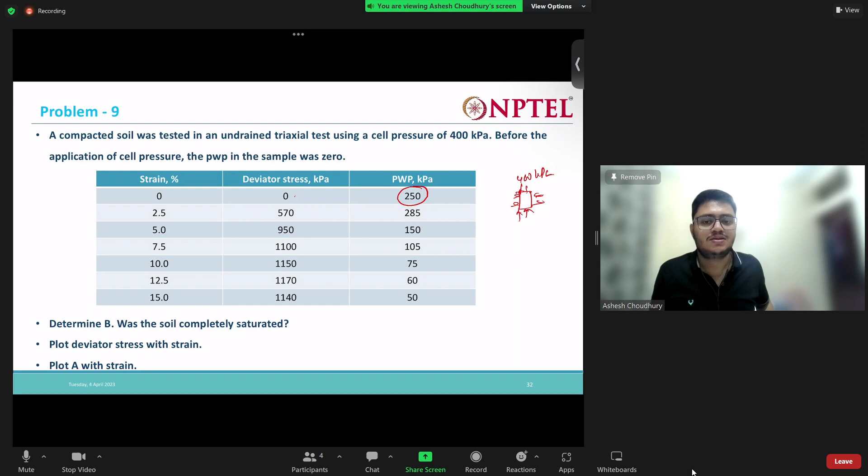You are applying 400 cell pressure, you are getting 250 pore water pressure. So is my soil completely saturated? Can you tell me from this data? First let us determine this B. What will be this B parameter? What is B parameter? Delta U by Delta sigma 3.

So what is delta sigma 3? Delta sigma 3 is 400. Due to this 400 application, what is the pore water pressure developed? 250. It's not completely saturated, because it is less than 1. If it would have been completely saturated and I would have applied 400 kPa cell pressure, I would have got pore water pressure equal to 400 only. Whatever cell pressure I would have applied, the same increase. Say I would have applied 200 cell pressure, I would have got pore water pressure 200. So we can tell the soil is not saturated from this because my B is less than 1.

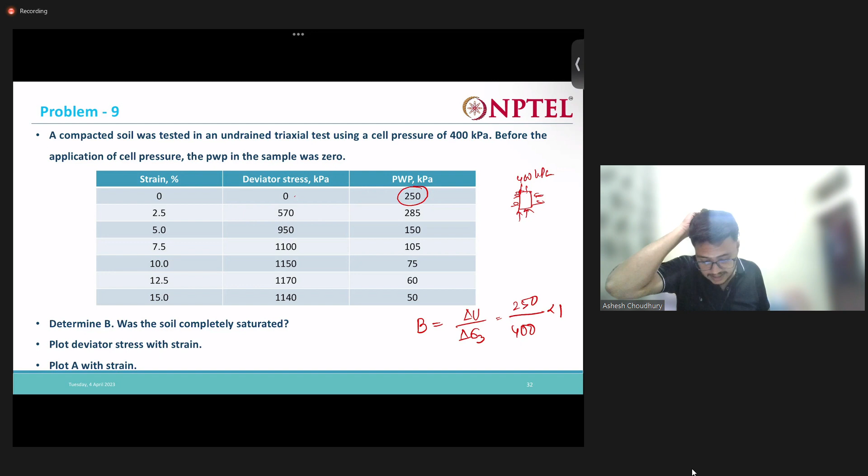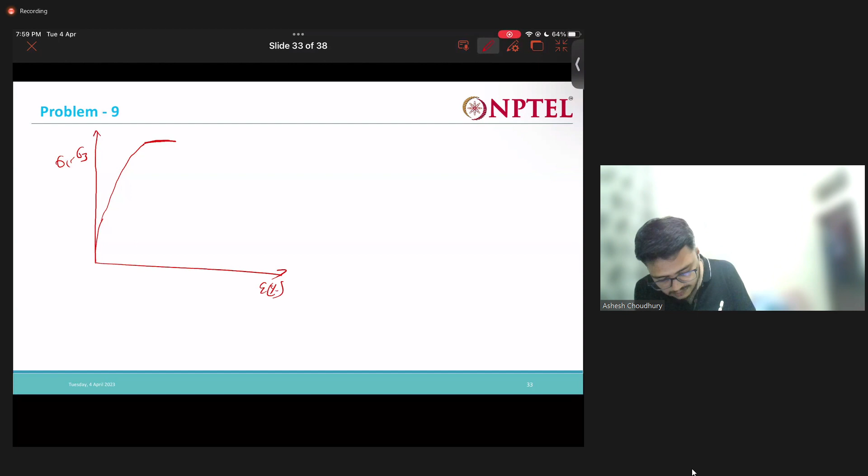Next, it's asked to plot the deviator stress with strain. You cannot plot it now, right? So if you plot the deviator stress with strain, we will get a curve like this. This is sigma 1 minus sigma 3, this is strain percentage. We'll get some curve like this. You can draw this by yourself in Excel and check once. You will get one curve like this. So plot and check once, in Excel, please plot and check what type of curve you are getting. For the previous one also, please plot and check by yourself in Excel once, what kind of curve you are getting.

Now second is plot. We need to plot A with strain, the A parameter with strain. For that we need to find the A parameter, right? So let us make a table.

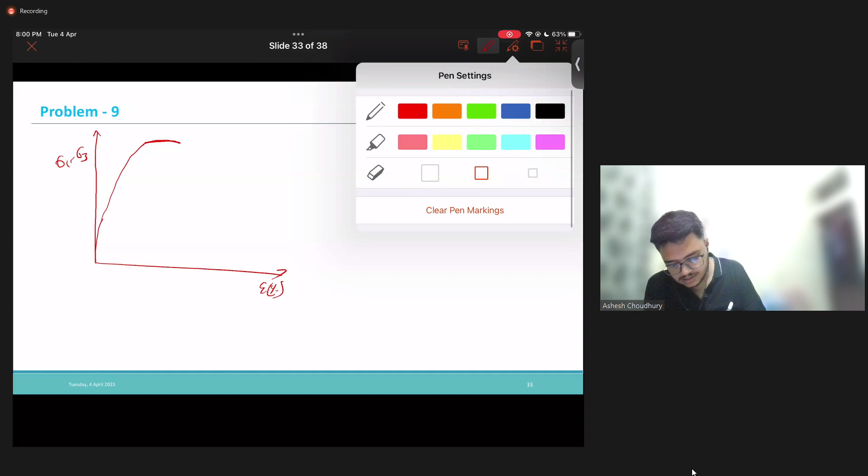I will just erase it to make some space. So strain, okay, strain, then delta U, delta sigma 1, delta sigma 3, then we have A dash. A dash is, what is A dash? Tell me, what is the value of A dash? AB. No, yeah, correct, AB. Well, correct, we'll write it in the next part.

So A dash is AB, so what will be A? We are asked about A, right? So here B is not equal to 1, so A dash won't be equal to A. So A will be equal to A dash by B. So A dash by 0 point how much? This is how much? 250 by 400? 0.625.

So we have strain. First strain was 2.5%, it was given, so we are writing from here. From here, 2.5, my pore water pressure was 285. So what is the increase in pore water pressure? From 250 to 285 by 35. It's getting increased by 35.

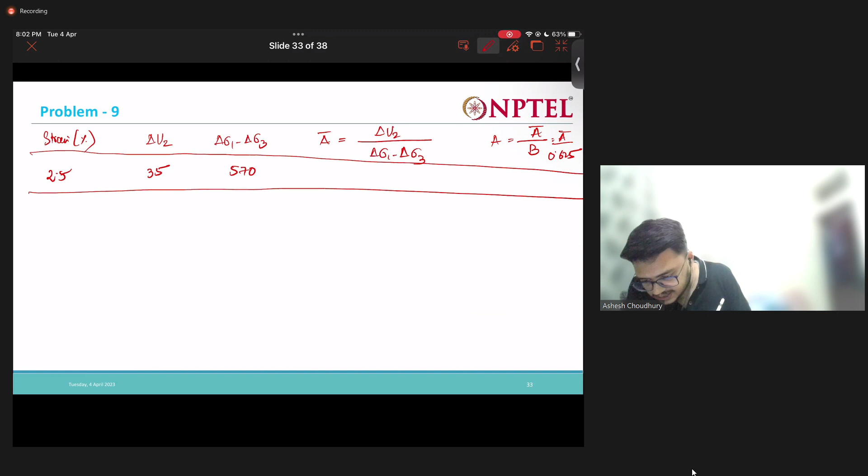What is delta sigma 1 minus this, deviator stress test? You write down deviator stress here. Like this, as you need to fill it. Next is 5, what is delta U? It is reducing. See, from 285, the pore water pressure reduces to 150. So 150 minus 285, it will be minus, sorry, 250 to 150, so from 250 it's getting reduced to 150, so it will be minus 100.

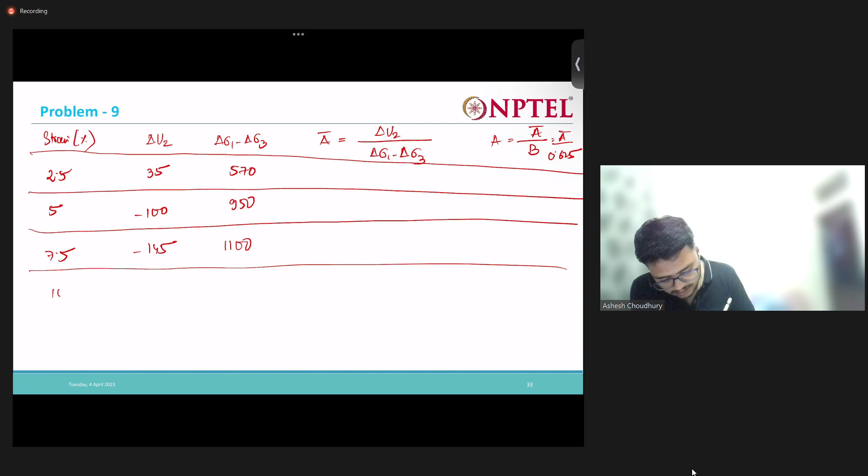And this one was 950. Like this, for 7.5 we have 250 to 105, so minus 145, this is 1100, it's given. Then 250 to 75 we have minus 175 for 10, 1150. Then same for 12.5 we have minus 190.

So these are the changes in deviatoric stresses, and these are my delta sigma values. This is delta sigma d, right? So initial delta sigma d was 0, so from 0 we are deducting everything, all that differences we are taking. 0 minus 750, 570 minus 0 is 570, 950 minus 0 is 950. So like this we are doing. And these are the increase.

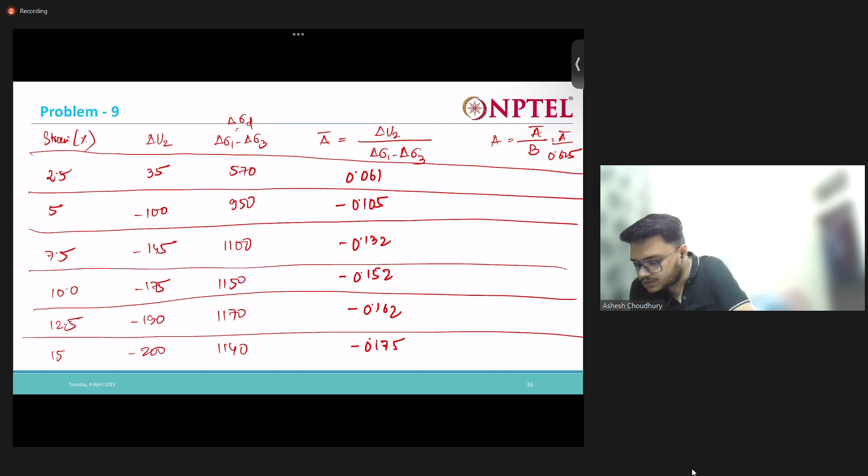Remember, these are the absolute total values, and from 250 you are deducting this, you are getting the change, the change in pore water pressure. So what is A dash? This divided by this, 35 divided by 570, 0.061, then it will be minus 0.105, minus 0.132. So this divided by 0.625, 0.061 divided by 0.625 is 0.097. So very simple, just divide by 0.625.

So again, if you plot this with respect to strain, you will get some graph like this. Just plot and check once, just plot the A values with strain. So here you take strain here and here A values, just plot. You will get some graph like this.

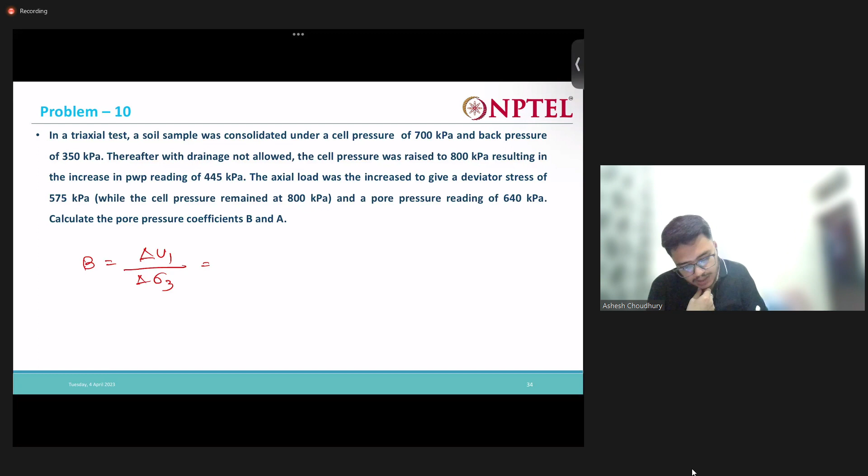Now the next part is we need to determine the A value. So in increasing the total major principal stress from 800 - initially sigma 1 was equal to sigma 3 equal to 800, then sigma 1 became sigma 3 plus 575, that is sigma d. That is 800 plus 575 equals 1375. So initially my sigma 1 was 800 and then my sigma 1 changed to 1375. So this 575 is the increase, this is my increasing deviatoric stress.

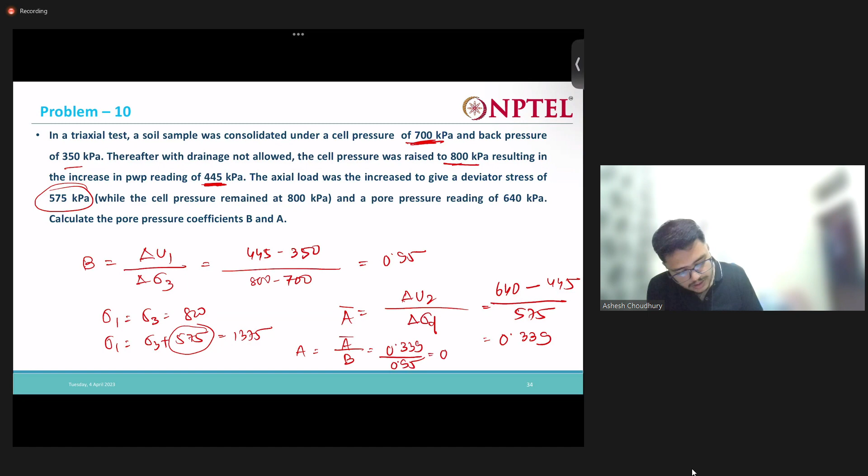So this divided by 575 will be actually 0.339. So now you got the A dash value, so A will be nothing but A dash by B: 0.339 divided by 0.95 will be 0.357. Okay, so I hope this is clear.

So first the B parameter you have to find out. B is the ratio of the increase in pore water pressure due to the cell pressure divided by the increase in cell pressure. Due to the increase in my cell pressure from 700 to 800, my pore water pressure got increased from 350 to 445. So using this is the first part, from this I found out my B.

The second part is that due to the increase in deviatoric stress from 0 to 575, my pore water pressure is changing from 445 to 640. So 640 minus 445 divided by the increase in deviatoric stress, which is 575, that will give me A bar.

Then we can find A equals A bar by B. Quite simple, so we just have to read the question very clearly, carefully, to understand what is happening there. First is the consolidation state, only cell pressure is applied - cell pressure increased from 700 to 800, due to this my pore pressure increased from 350 to 445, using this I got my B value. Second comes my deviatoric state - due to the increasing deviatoric stress from 0 to 575, my pore pressure got increased from 445 to 640, so using that I got my A value.

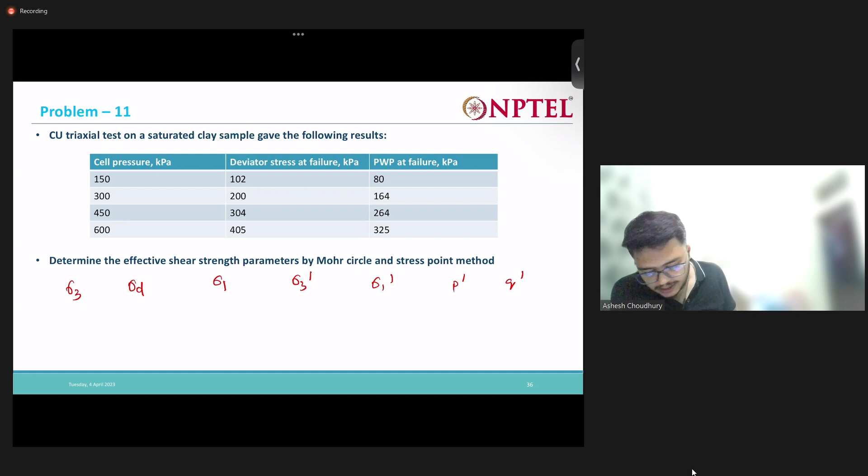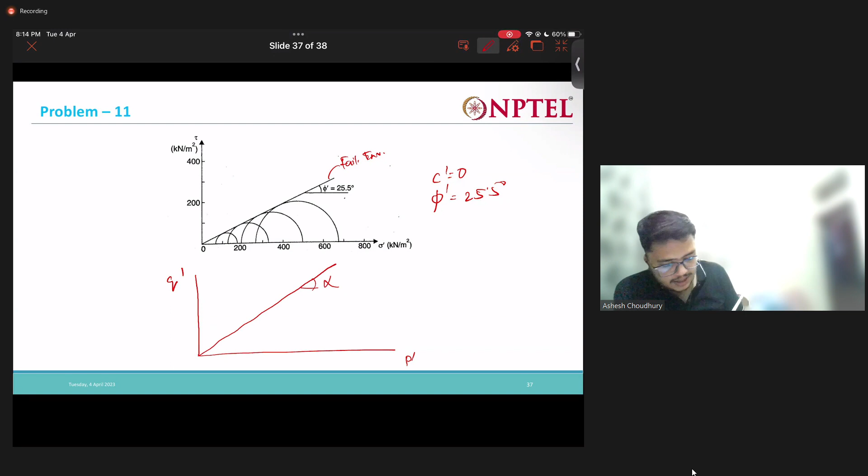Now similarly, since we know P dash and Q dash, we can draw our KF line using P dash and Q dash. If we plot all these points, we will get a straight line. This will give you, before I wrote this as alpha, so I will again write it as alpha only, alpha value. Okay, so this alpha value you will get as 23 degrees.

Now you had one relation between alpha and phi, right? What was the relation? Phi dash is equal to sine inverse of tan alpha. Okay, so you put 23 degrees here, you will get 25.5, approximately 25 degrees, right?

So in the same way, you can also determine the total stress parameters by plotting P and Q. You can also plot P and Q, and from there you can get the phi value.

And one more thing I wanted to tell you: when you are plotting this P dash and Q dash, say you get some intercept A, this is alpha, say you get one intercept A here. So from A, how can you determine the cohesion? You can determine the cohesion by using this relation,

by cos phi. So first you determine phi is equal to sine inverse tan alpha, and then after determining phi, determine C is equal to A by cos phi. A is nothing but the intercept made by the KF line in the P dash Q dash space. Okay, like this you can find out.